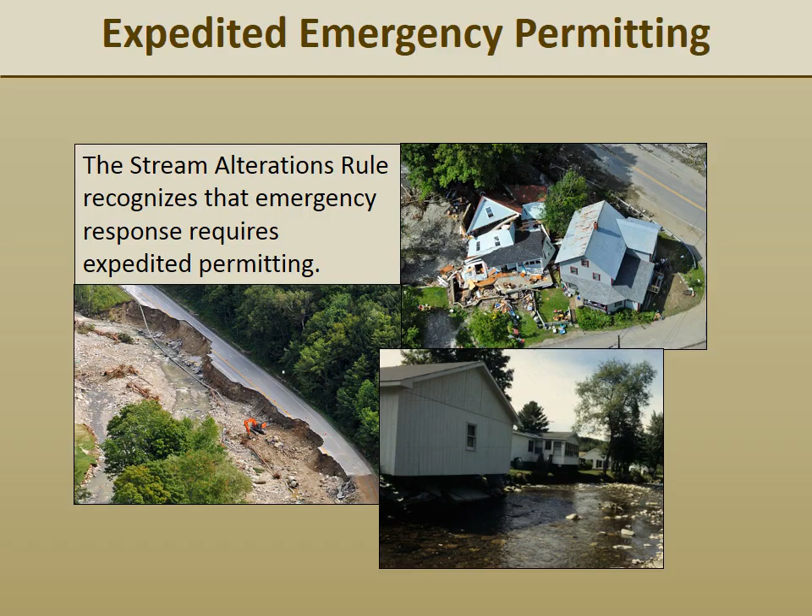Vermont stream alterations rules recognize and accommodate the reality that flood events may give rise to emergency situations in which flooding and flood-related erosion may threaten life or property, and that addressing these threats often requires rapid implementation of measures which cannot afford to be slowed by standard permitting procedures. Yet at the same time, we must be careful that in mitigating perceived threats, we don't inadvertently set the stage for greater threats to public safety and property damage in the future. And to the greatest extent possible, we don't damage fish and wildlife and their habitats.

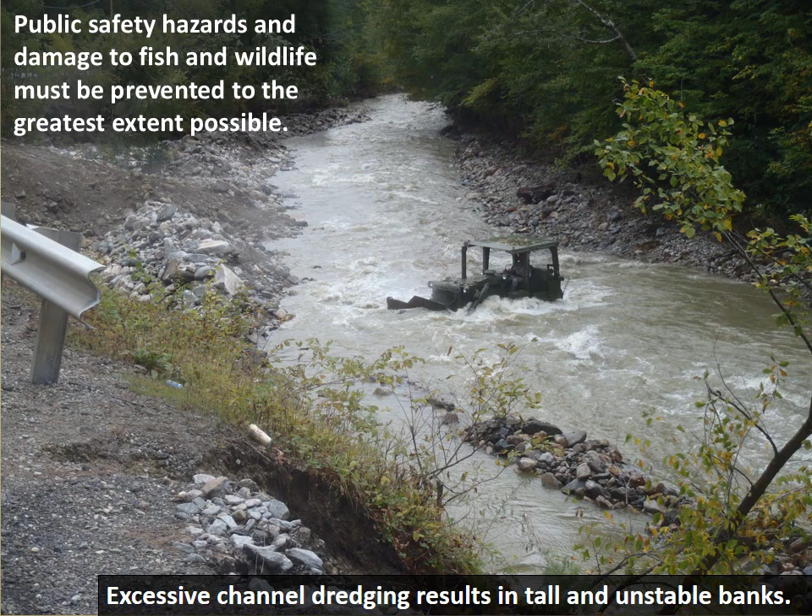For instance, a good deal of the in-stream work conducted during the Irene recovery actually created greater vulnerability to erosion damage, and in some cases caused significant damage to fish and wildlife. Prior to 2012, Chapter 41 of Title 10 of state statute provided select boards with the authority to authorize in-stream work to address imminent threats to life and/or property. However, the statutory language didn't contain much detail as to how work would be conducted or reported.

During the Irene recovery, a great deal of work was authorized locally with no pathway for communication of these authorizations to state officials. Subsequently, many projects were implemented with no oversight and as a result were not effective, created a greater level of hazard, resulted in damage to natural resources, and created a great deal of public concern. Following the Irene flooding, the 2012 Rivers Bill was passed by the legislature and signed by the governor. The Rivers Bill modifies a pre-existing statute to require that measures authorized by a municipal legislative body or member thereof meet specific reporting requirements and implementation standards as established by the Agency of Natural Resources.

The Agency of Natural Resources responded to the Rivers Bill by developing two new processes for authorization of emergency work: the Emergency Protective Measures process and the Next Flood Measures process. Emergency protective measures address threats to life and property that are imminent, with imminent meaning that damage would occur within 72 hours if no action were taken. The Emergency Protective Measures process allows projects to be initiated upon local approval, with review by the Agency of Natural Resources occurring within 24 hours of that approval.

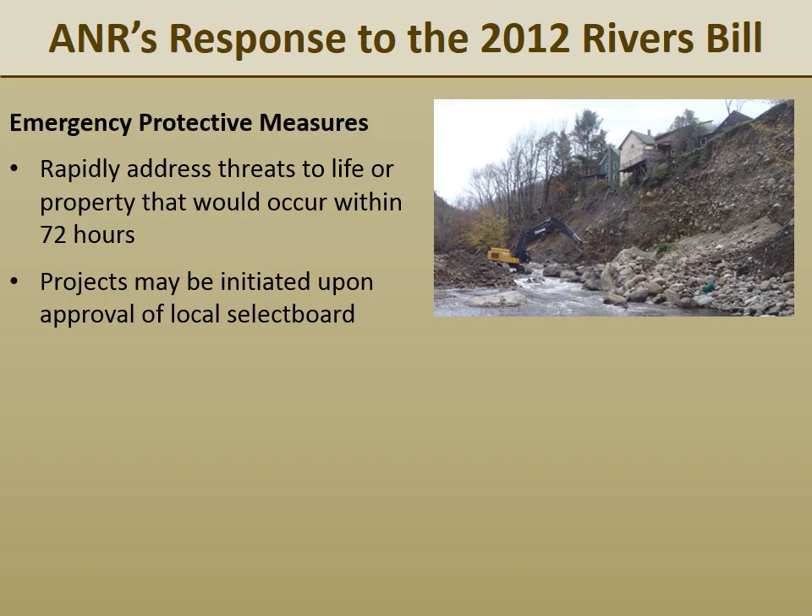Next flood measures are those measures taken where threats to life or property are not imminent, but would be created by a small to moderate and therefore fairly probable flood event within the near future. Consider the hypothetical case where a large flood jeopardizes a structure, but is not so damaging as to create an imminent threat to that structure. If the structure was vulnerable to the extent that another flood, even of small to moderate size, would cause significant damage to the structure, work to mitigate that threat could be authorized under the Next Flood Measure process.

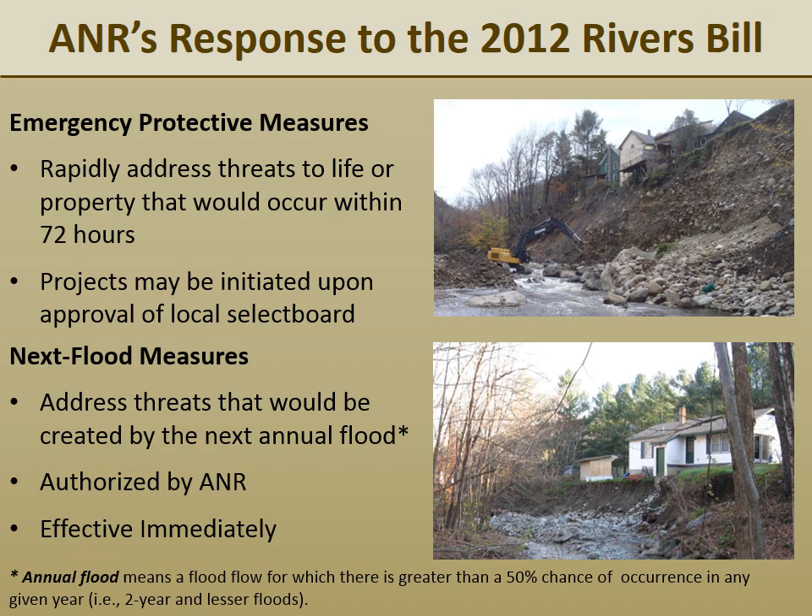Next flood measures are authorized by the Agency of Natural Resources, and municipalities don't play a role. However, it is important for municipalities to understand that where there is no imminent threat and there is time for the project proponent to contact the Rivers Program, the Next Flood Measures process is the more appropriate and certainly the less burdensome alternative for the municipality. The Next Flood Measures process is expedited in the sense that it does not require a public notice period. Once the river management engineer reviews the proposal, he may issue a permit immediately.

Before going on, it is important to point out that a distinction is made between improved and unimproved property in both of these processes. Because of the public safety aspect associated with threats to improved property, i.e. habitable structures and infrastructure, next flood and emergency protective measures taken to address threats to improved property do not have to meet the same level of standards as those taken to protect unimproved property. A measure taken to protect unimproved property shall not significantly damage fish life or wildlife, the rights of riparian landowners, nor adversely affect an outstanding resource water.

A measure taken to protect improved property shall not, to the greatest extent possible, significantly damage fish life or wildlife, the rights of riparian landowners, nor adversely affect an outstanding resource water. Improved property is defined as a habitable structure and immediately surrounding property, public utility or transportation infrastructure, and infrastructure providing access to a habitable structure.

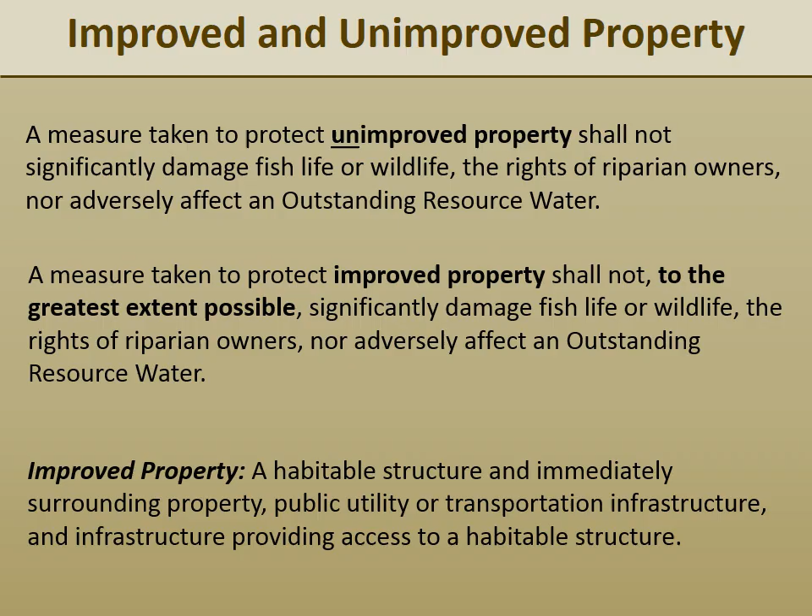So let's take a closer look at the reporting and authorization process for next flood measures. Again, the next flood measures process is designed to protect against threats to life or property that would be created by a small to moderate flood. Next flood measures are authorized by the Agency of Natural Resources and are expedited in the sense that there are no pre-established review timelines nor public notice periods. Upon review of project information, the river management engineer is able to immediately issue an authorization.

While municipalities don't play a role in the next flood measure process, it is important that they are aware of it as the appropriate alternative to address situations where a small to moderate flood would create damage, but there is no threat to life or property occurring within 72 hours in the absence of flooding. The process is fairly straightforward and begins when the Agency of Natural Resources receives a request for authorization from either a public or private entity.

The river management engineer will review the proposal and may either request additional information or make a determination as to whether the project can be authorized as a next flood protective measure. If upon review of the proposal, the river management engineer determines that there is no vulnerability to the annual flood, the authorization will be denied. In this case, the applicant could apply for authorization under the General Stream Alterations Permit process.

If upon review of the proposal, the river management engineer determines that there is vulnerability to the annual flood, the authorization will be issued and posted on the agency website. As soon as the authorization is issued, the project may proceed.

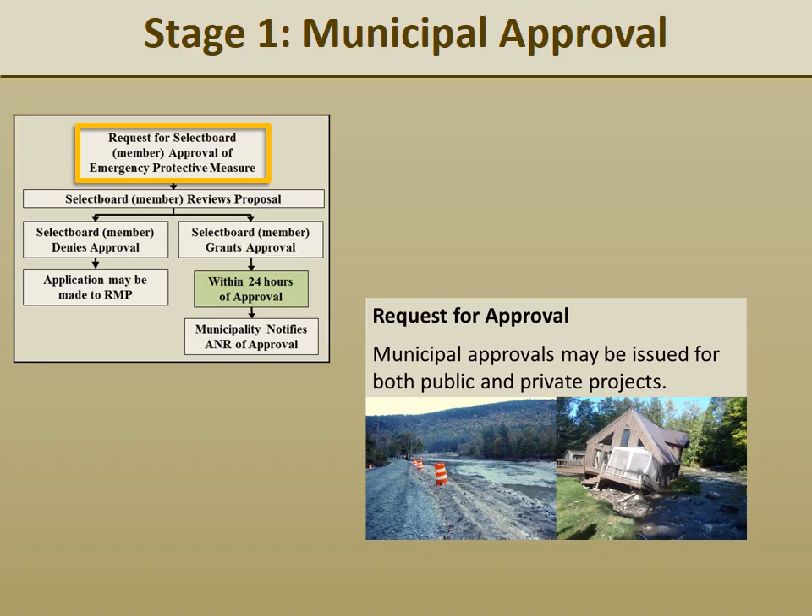Now let's walk through each of the three stages in more detail, beginning with the municipal approval stage. The first step in this stage is the request for authorization. Keep in mind that requests for emergency protective measures can come from either private citizens to protect private property or municipal officials, most likely the highway department, to protect municipal property.

The second step in the municipal approval stage is review of the proposed emergency protective measure. In determining whether or not a proposed activity can be authorized, the Select Board or individual board member must make four findings. First is that the proposed project is necessary to mitigate an imminent threat to life or property. Second is that it will not adversely affect public safety. Third is that the project is limited to the minimum amount of work necessary to remove the threat. And fourth is that the proposed project activities are allowed activities as listed in the Stream Alterations Rule.

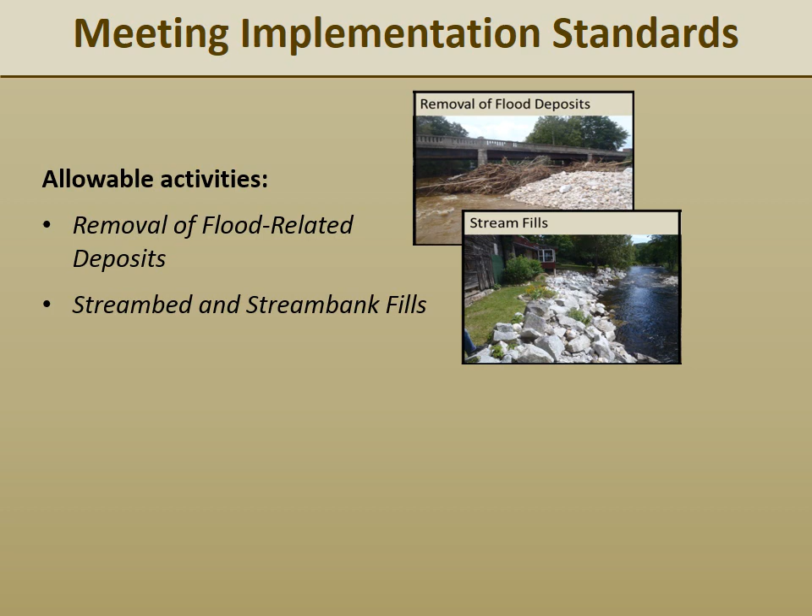The Stream Alterations Rules establish implementation standards that must be met. A component of the implementation standards defines the activities that may be authorized through the emergency protective measures process. In establishing the list of acceptable activities, an attempt was made to create simple categories of general activities that would capture all the types of work that would be reasonably necessary to address imminent threats to life or property. The categories of activities include the removal of flood-related deposits, stream bed and stream bank fills, temporary stabilization and restoration of infrastructure, and construction of temporary berms.

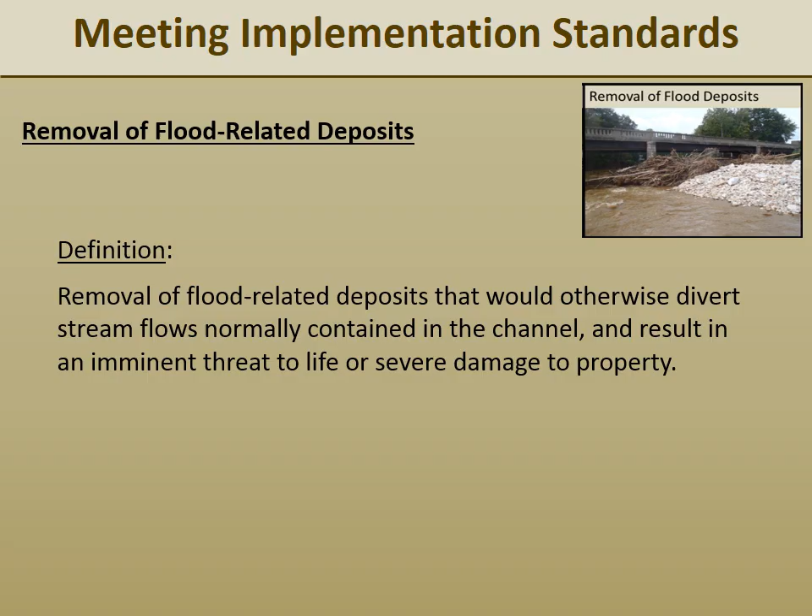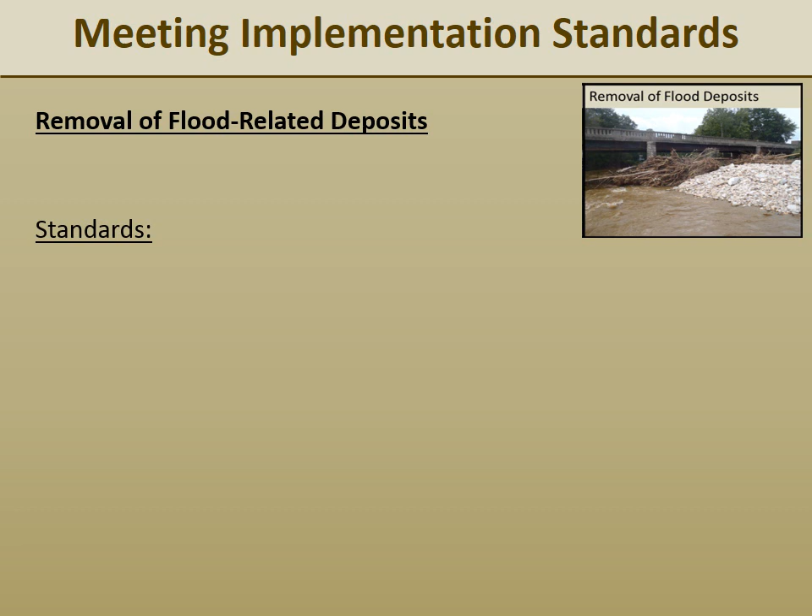So let's look at the individual categories in more detail, beginning with the removal of flood-related deposits. The definition is the removal of flood-related deposits that would otherwise divert stream flows normally contained in the channel and result in an imminent threat to life or severe damage to property. The implementation standards for removing flood-related deposits are as follows. Channel excavation must restore the pre-flood cross-section or establish a geomorphically stable channel.

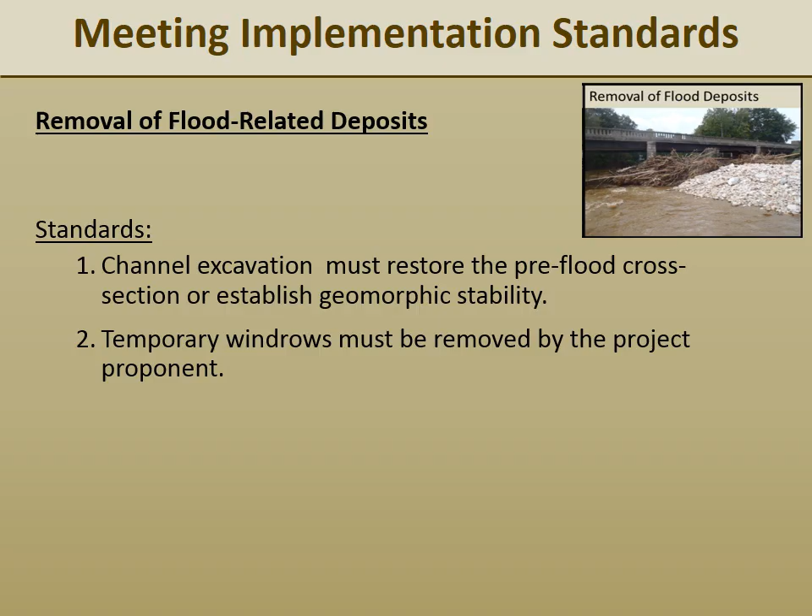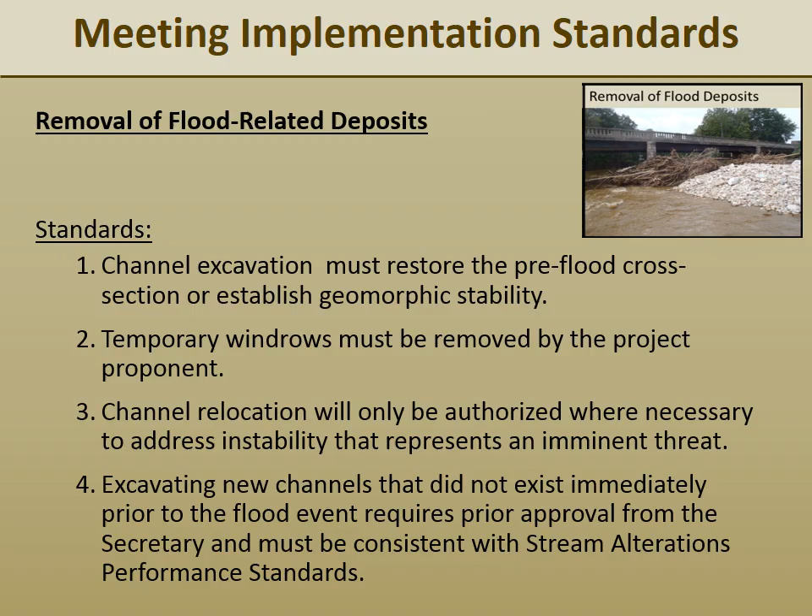Temporary windrows must be removed by the project proponent. Channel relocation will only be authorized where necessary to address instability that represents an imminent threat. And excavating new channels that did not exist immediately prior to the flood event requires prior approval from the Secretary and must be consistent with stream alterations performance standards.

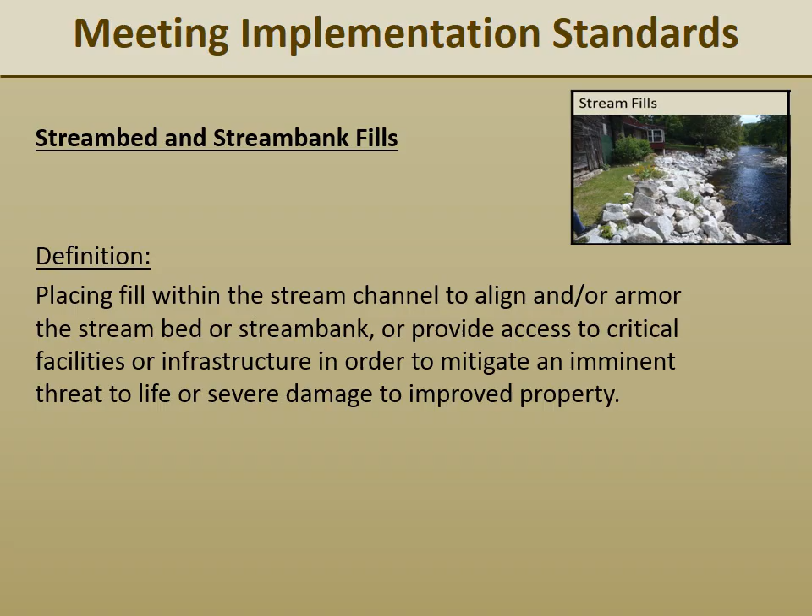Now let's turn to the stream bed and stream bank fills category. The definition is given as the placing of fill within the stream channel to align and/or armor the stream bed or stream bank or provide access to critical facilities or infrastructure in order to mitigate an imminent threat to life or severe damage to improved property.

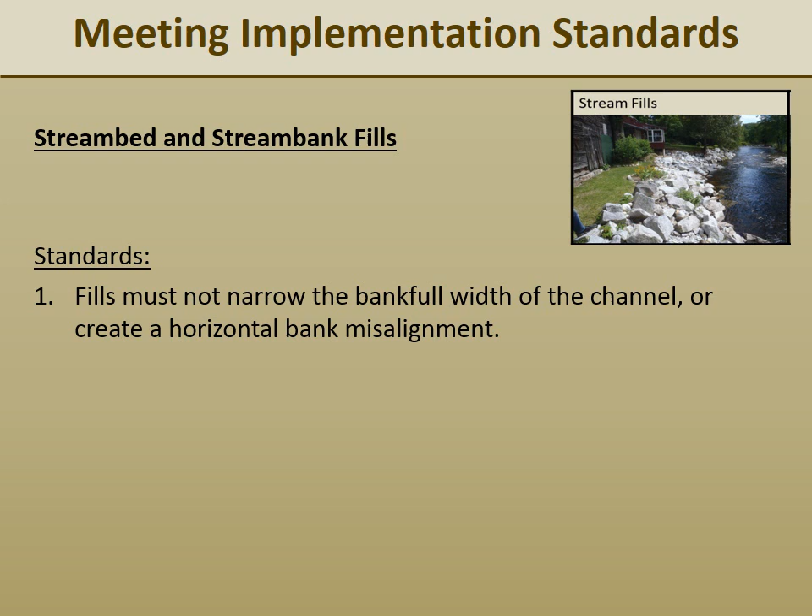The implementation standards for making stream bed or stream bank fills are as follows. Fills must not narrow the bankfull width of the channel or create a horizontal bank misalignment, and raising and stabilizing a stream bed shall only be conducted when overseen by a qualified river engineer or their designee, and the work must have prior approval from ANR.

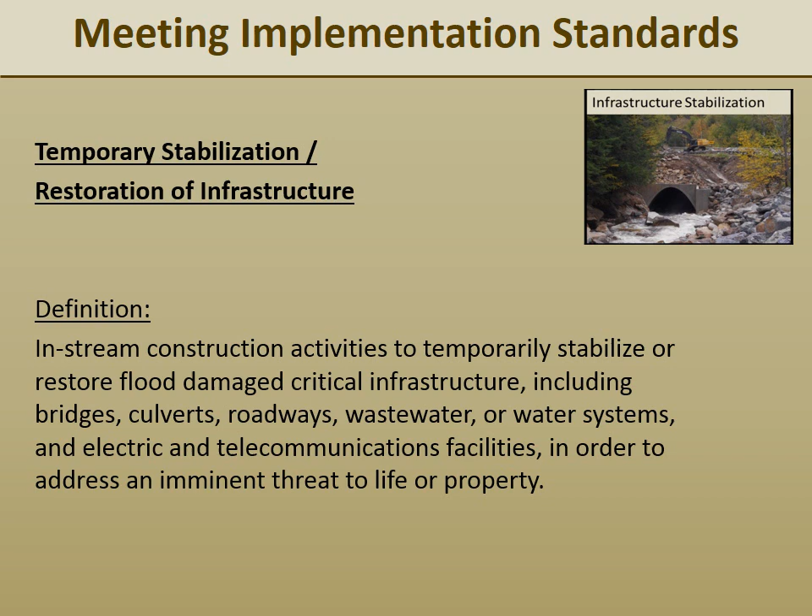Looking next at temporary stabilization or restoration of infrastructure, the definition is given as in-stream construction activities to temporarily stabilize or restore flood-damaged critical infrastructure, including bridges, culverts, roadways, wastewater or water systems, and electric and telecommunications facilities, in order to address an imminent threat to life or property.

Temporary stabilization or restoration of infrastructure will require the implementation of one or more of the other three categories of measures. As such, the implementation standard simply states that the measures taken will meet the implementation requirements for whatever category of activity is utilized.

Also, if the stabilization and/or restoration of infrastructure requires fills or installation of structures that encroach into and narrow the bankful width of the stream channel, create an acute horizontal stream bank misalignment, and/or use undersized or otherwise unsuitable materials for stream bank and/or roadway embankment stabilization, these fills or structures shall be temporary, and the final ANR authorization shall include requirements for the permanent repair or replacement of the infrastructure, including a date when any permanent repair or replacement work must be completed.

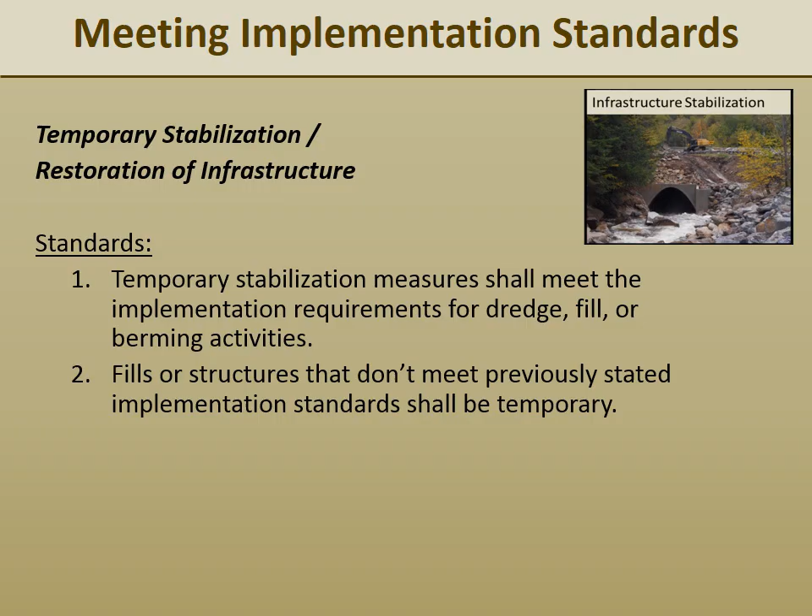Berms are the linear piles of aggregate or other material placed along the tops of the stream bank to prevent flood flows from spilling into the adjacent river corridor area. The emergency protective measure process recognizes the potential need to construct berms to address imminent threats.

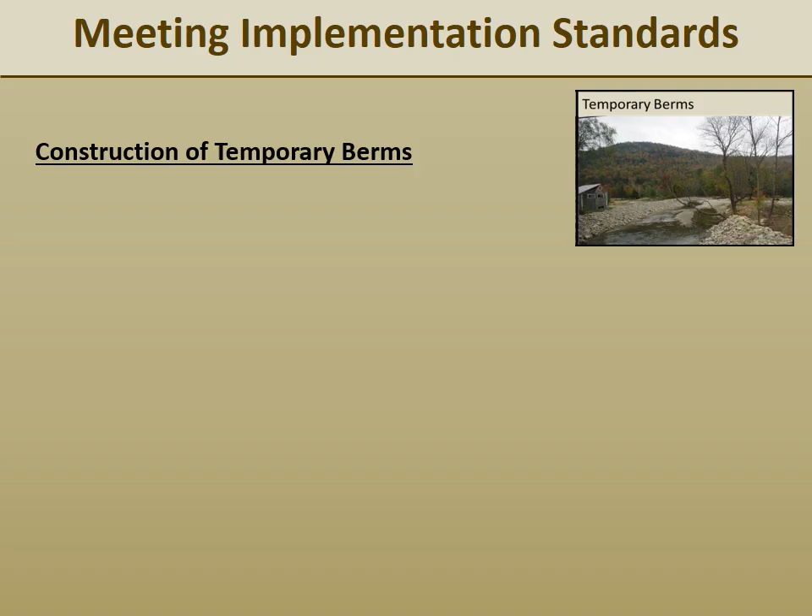However, due to the increased in-channel erosion that berms cause by containing flood flows and their excessive erosive energy within the channel, berms may only be established, constructed, or maintained in a flood hazard area or river corridor where they are necessary to preserve life by preventing stream flows from impinging directly on an improved property. Berms constructed for this purpose shall be considered temporary and shall be removed coincident with the removal of threats to public safety.

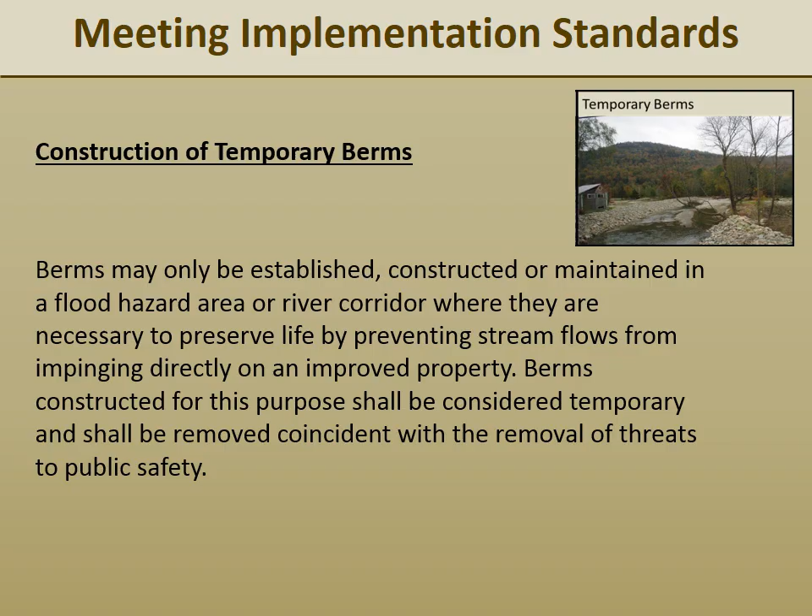In summary, upon receiving a request for municipal approval, the Select Board or individual Select Board member must review the proposal and determine if it meets specific conditions. First, is the project necessary to mitigate threats to life or property? Second, will the proposed project activity adversely affect public safety? Third, is the project limited to the minimum amount of work necessary to remove the threat?

And fourth, are the proposed activities on the list of allowed emergency protective measure activities? The answers to these four questions determine whether the project can be approved as an emergency protective measure.

If the Select Board or individual Select Board member determines that the proposed activity is not necessary to address an imminent threat of damage to life or property, or that it isn't an allowed activity or will not meet the implementation standards, it may deny the request, at which point the applicant may seek an authorization under either the next flood measure or general permit or individual permitting processes.

If the Select Board or individual Select Board member makes the required findings and approves the measure, the project may commence, and the town must within 24 hours provide the Agency of Natural Resources with required information including project location, description of the imminent threat, and a description of the authorized activity.

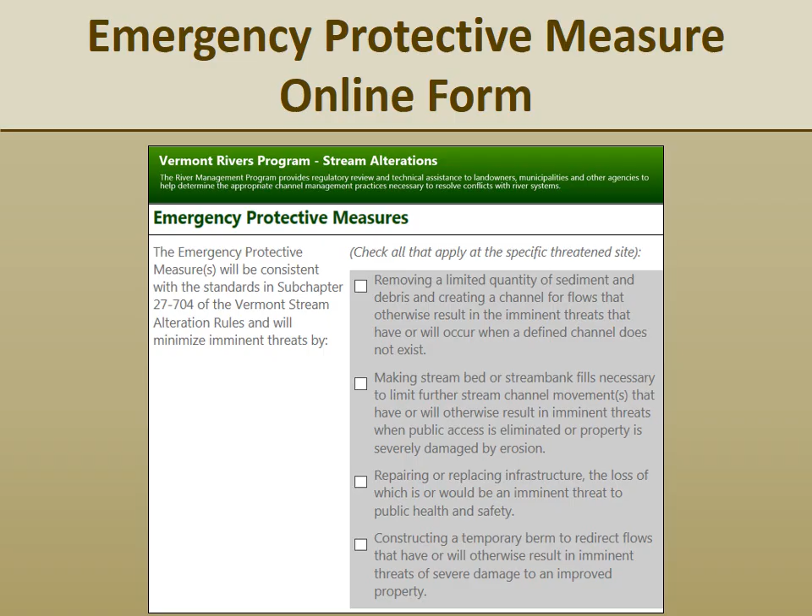The fifth section asks whether a river management engineer has been notified by phone and provides a submittal button. In the case that the user intends to enter information for more than one locally authorized emergency protective measure, the Submit and Enter Another Report button is particularly useful because it brings up a new form pre-populated with all of the general municipal and contact information so that the user doesn't have to enter it all again.

And that's all there is to providing electronic notification of municipally approved emergency protective measures. Submittal of this form triggers a series of automatic emails. One goes to the engineer, who will then contact the municipality about preliminary authorization. Another automatic email goes to the municipality to serve as documentation that they made the required electronic notification.

We left off at the end of the first stage where a request for local authorization had been made, reviewed and authorized by the Select Board or individual Select Board member, and the municipality notified ANR of the authorization via the online web form. Once approval of an emergency protective measure is reported to ANR, Stage 2, which is the preliminary ANR authorization stage, begins. The Regional River Management Engineer will review the approval and take one of the following 3 actions.

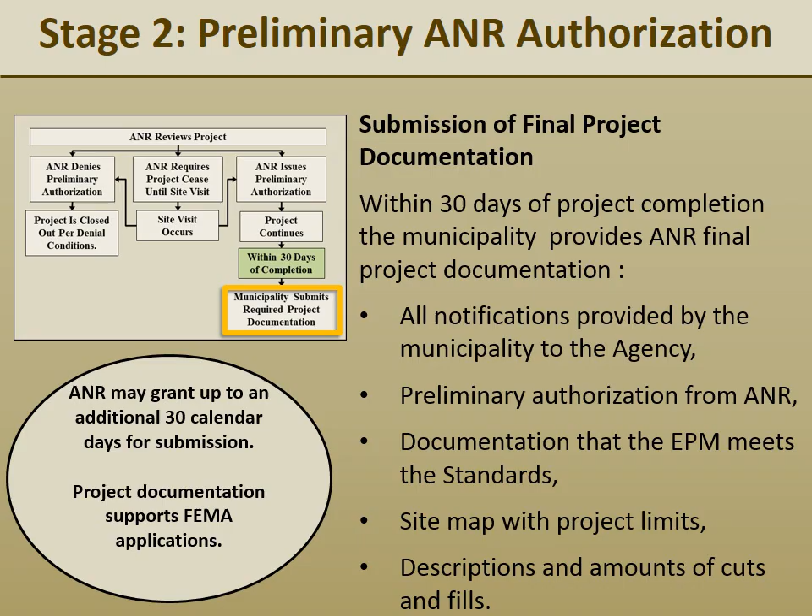Once the project documentation has been submitted by the municipality, the final ANR authorization phase begins. ANR will review the final project documentation to determine whether the project received initial approval by the local select board, received and complies with the preliminary ANR authorization, and is consistent with the standards for implementation provided in the Stream Alterations Rule. If the final authorization is denied, ANR may work with the municipality and the project proponent to bring the project into compliance or take enforcement action if necessary.

If final authorization is provided, it will be in the form of a general or individual permit, and ANR will post the authorization and project documentation on its website in compliance with agency public notice requirements. Let's take a moment to look at the public notice requirements that exist at various points throughout the process. The requirements include that notifications, authorizations, and project documentation, as they are issued, be placed in the following locations: on site while the project is being implemented, on file in the town office until a final authorization is provided, and on file with ANR, where they will be posted on an ANR webpage for no less than 90 days after the final authorization is issued.

As we've seen, there are a variety of municipal responsibilities throughout the emergency protective measure authorization process. The assignment of these responsibilities will likely vary from municipality to municipality depending on local circumstances. How a municipality decides to assign roles and responsibilities is best left to the municipality. As with all emergency response systems, what is important is that roles and responsibilities are assigned prior to an event so the municipality is prepared to act when the time comes. The following possible arrangement of roles and responsibilities is presented as a starting point for discussion amongst your community officials as to how to best organize for the emergency protective measures process.

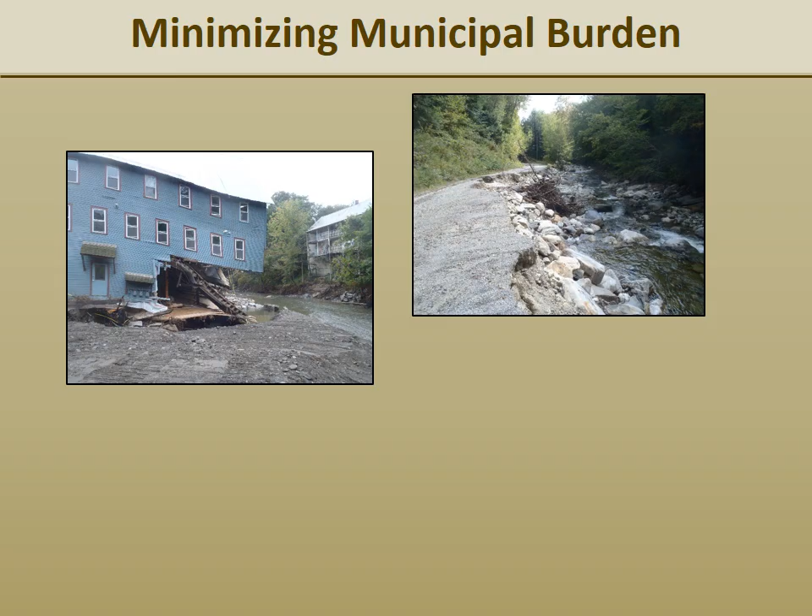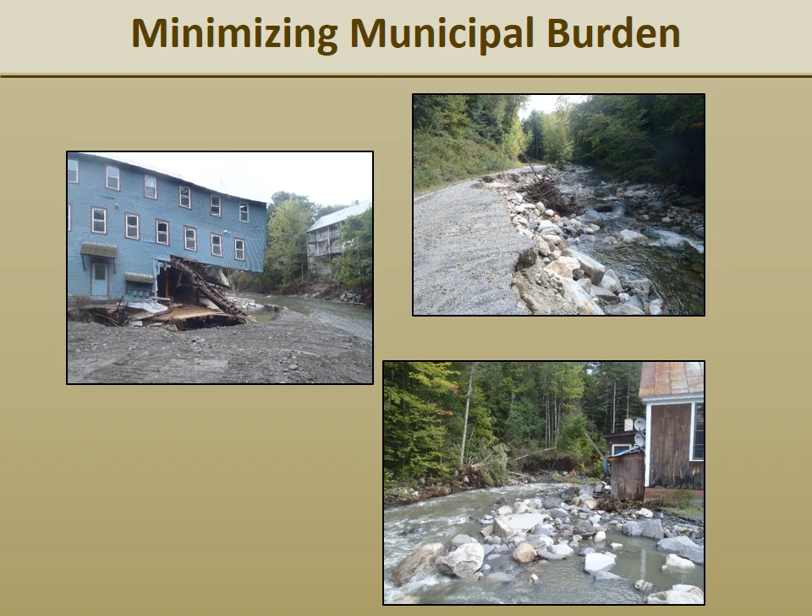And that completes this overview of the Emergency Protective Measures process. Again, the intent of the process is to facilitate rapid response to imminent threats to life and/or property, while at the same time providing for the appropriate ANR review, technical assistance, and authorization, as well as public notice. As you have just seen, meeting these sometimes conflicting goals does require a process that depends upon a fair amount of municipal involvement. The Rivers Program has attempted to minimize the level of burden created by the Emergency Protective Measure process, but the best way to minimize that burden is to reserve its use for situations where there are true imminent threats. Where imminent threats are not present, the municipality will best be served by directing project proponents to the Rivers Program for authorization under either a next flood measure or general or individual permit process.

And that concludes this presentation on the authorization of emergency in-stream work in accordance with Vermont law.